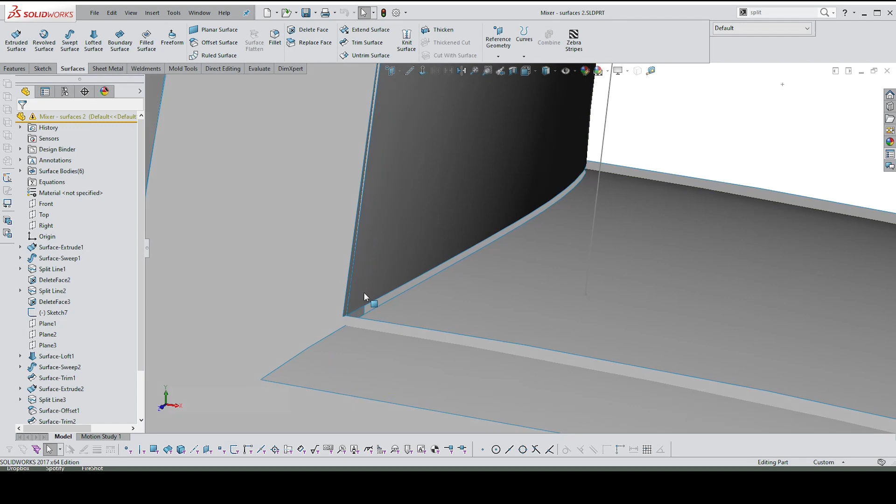What I showed you on Tuesday was in fact in many ways unusable, other than being able to generate surfaces, and I'll show you why very quickly. If I try and trim the surface, you'll see what's going to happen. You can have a look just without trimming it. You can see the gaps in these items. They don't line up.

When I try and trim it, it's going to create a mess, so I'll just show you quickly. If I say remove these two items, I'm left with a tiny sliver over here, which also relates to how that top surface or this outer surface relates to the handle, because if I try and trim this, it trims away the whole handle. To get that right, I'd have to go back and fiddle with items to get them to extend beyond one another.

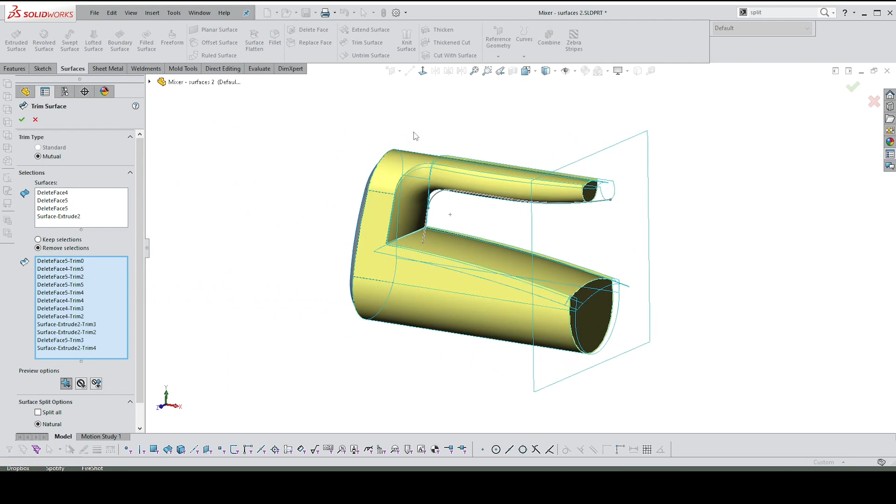And so it actually ultimately is not giving me what I want. So no matter what I do, I'm always going to be left with strange surfaces left over, which I'll never ever be able to probably get to work, or to actually knit together again.

So let me show you quickly what it is we can do with a whole lot simpler process, much more accurate. It's going to look more complex, but is in fact much simpler.

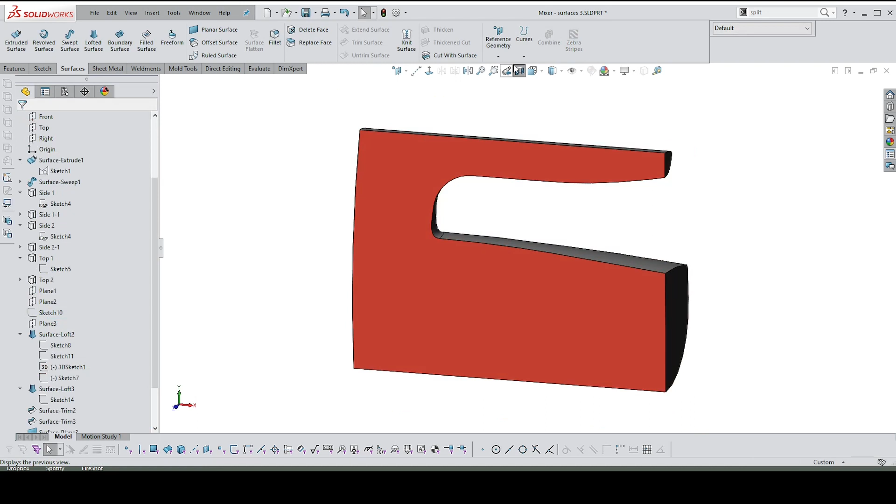So this, if you have a look at it, is a solid. So I've been able to knit together, I've been able to trim everything. I've left out some details, but those details can be created once this is a solid.

So to do this, I'm going to create a new item, a new part. And there are a few things I didn't show you in the lesson. One is that we actually do need some kind of sketch to start with.

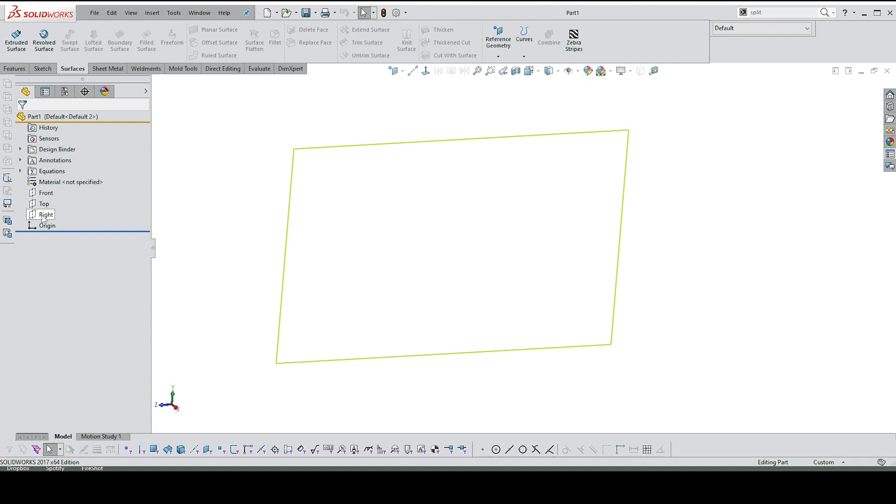So I'm going to put a sketch on the right plane. When I say a sketch, I mean I want a sketch, an actual sketch picture, which is something I would have drawn in a program like Sketchbook Pro, or whatever sketching program it is that you use. So this is something I drew in 2D. Obviously, I would have drawn it to scale. This is what I would have figured. This is not going to be suitable in this case, but it was just an exercise.

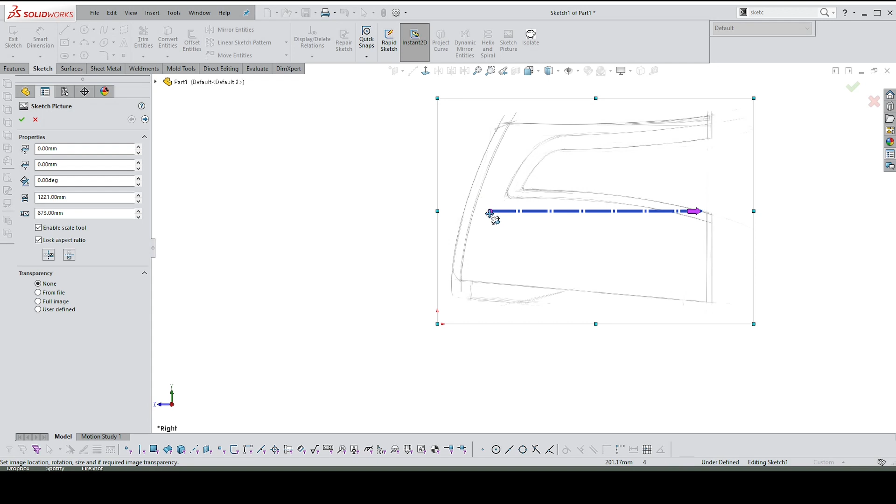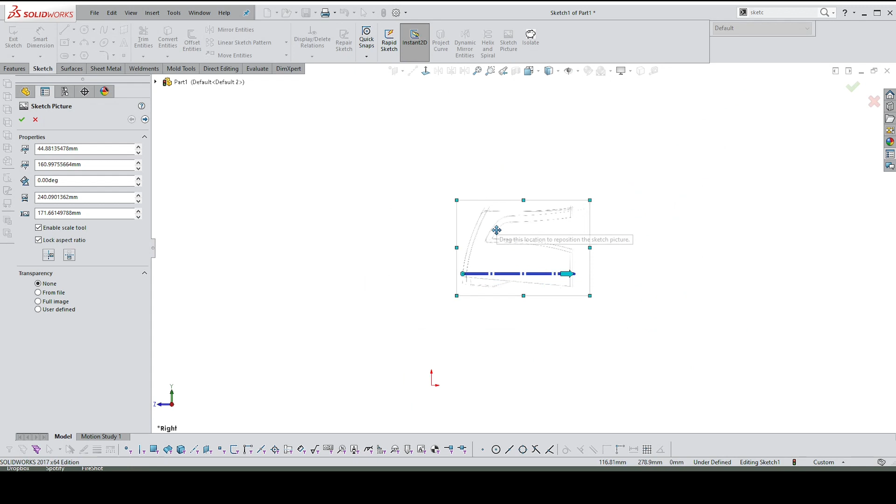The way this sketch picture works is you drag the left-hand side of the scaling bar to the left-hand point of your sketch, and then you drag the right hand out to the right-hand side, and then you'll get this dimension dialog box, which you can enter the actual dimension you want, 200. It might go off screen, just zoom to fit, and then you will drag this to a point that you'd find suitable.

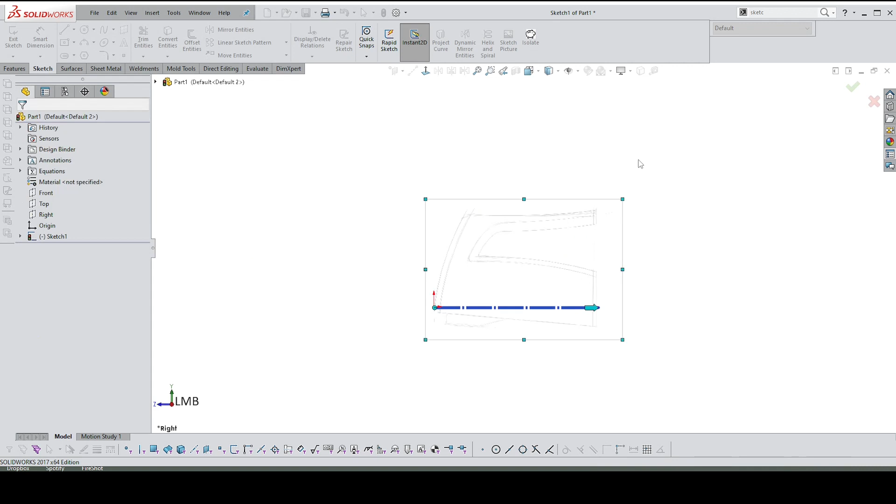So it might be there or somewhere else. What you can also do is, in the transparency, you can change your transparency to, say, half or whatever it is that you find suitable. And then we say, okay, all right, so that would be the sketch, and then I could actually use those lines to start the whole item.

I'm going to delete this because I'm not going to use it. So let's just exit the sketch.

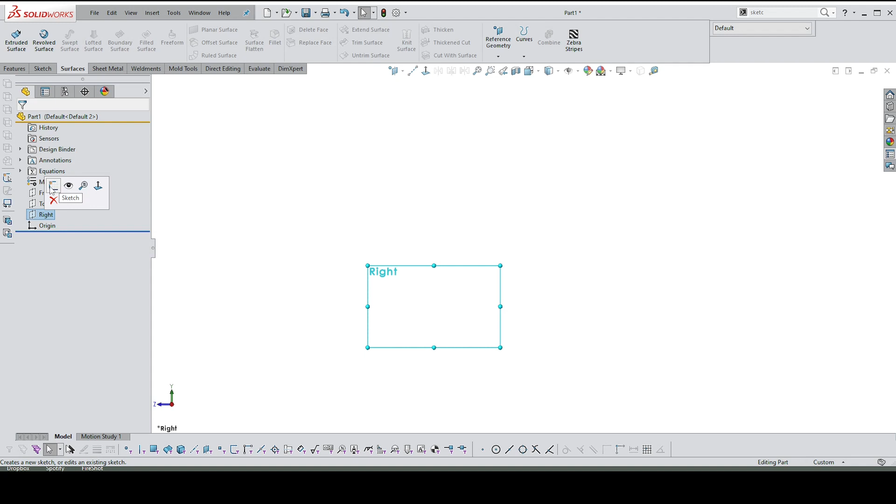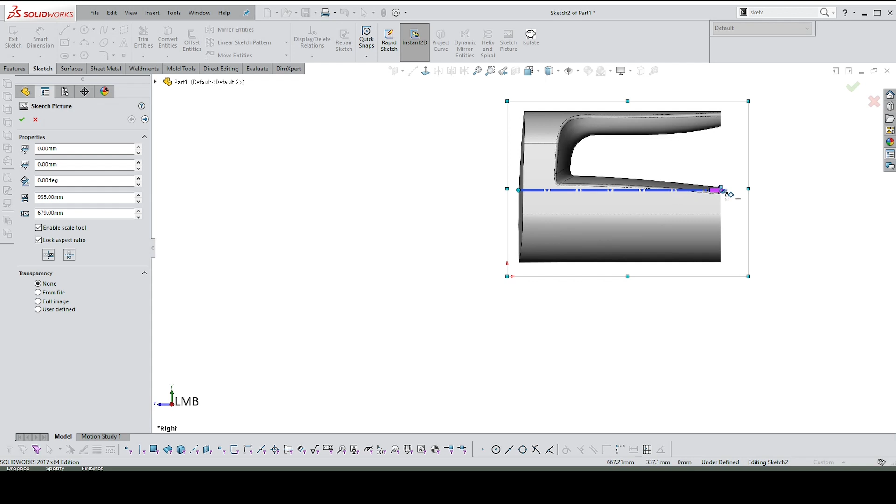Instead, I'm going to bring in two sketches which I've copied from that prior model that I showed you. Sketch picture, which will be here, and then it'll be that one there, which I will attempt to scale very quickly. So let's just bring that across. So this is kind of rough at the moment.

I don't need it to be accurate because I know where I'm going with this, but you can have, obviously, if you want to make it more accurate, somewhere around there, I think we'll do it. And change the transparency to about 0.65.

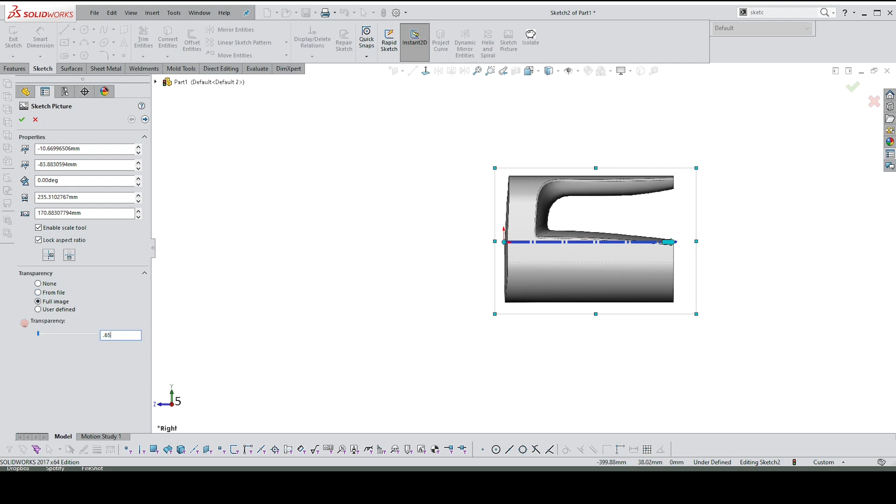Out we go. And then in the top view, I'm going to do the same thing, sketch. So in this case, it's going to bring the sketch in the wrong orientation, I'm pretty sure. It has.

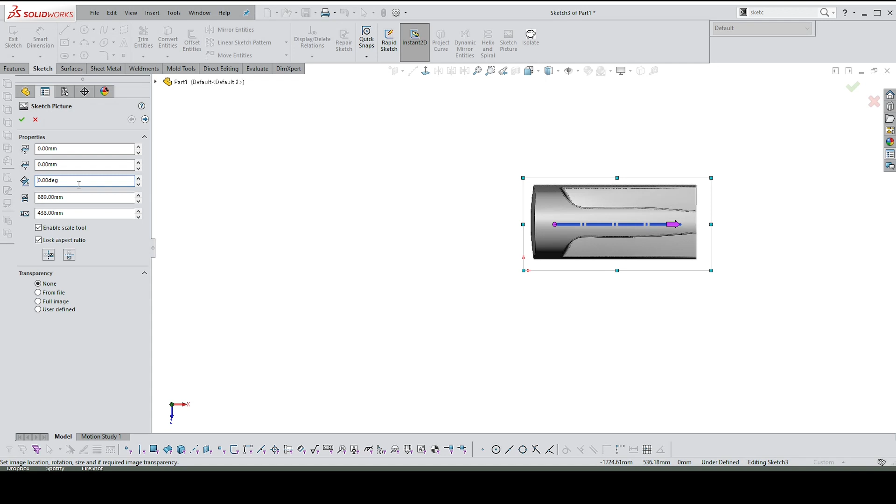The way to get this to change is just to type in here under degrees. I want mine to be 90. That should be right. And then drag this down, that one up. That'll be 200 as well. Roughly in place.

Make this a lot more transparent and exit. Okay, so let's just see if we have two. Yes, we have two intersecting sketches, which will give us a strong guide as to what we want to do.

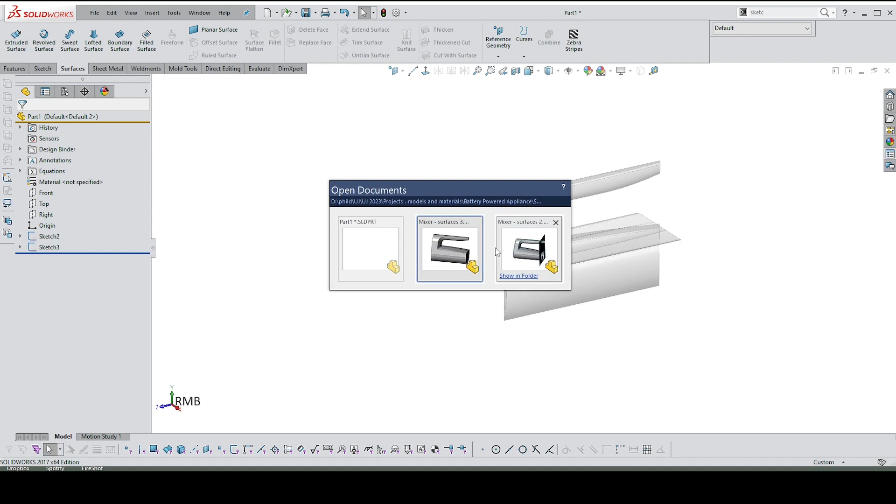I'm going to show you a neat little trick, which doesn't really apply to this, but will apply to other things. If you've got two models and want to copy sketches from one to the other without having to redraw, you just click on the sketch. At the moment, I want to make sure I place the sketch in the correct view again. I've got my sketch in my right view, and my other sketches might not be right, but I'll show you how to do this.

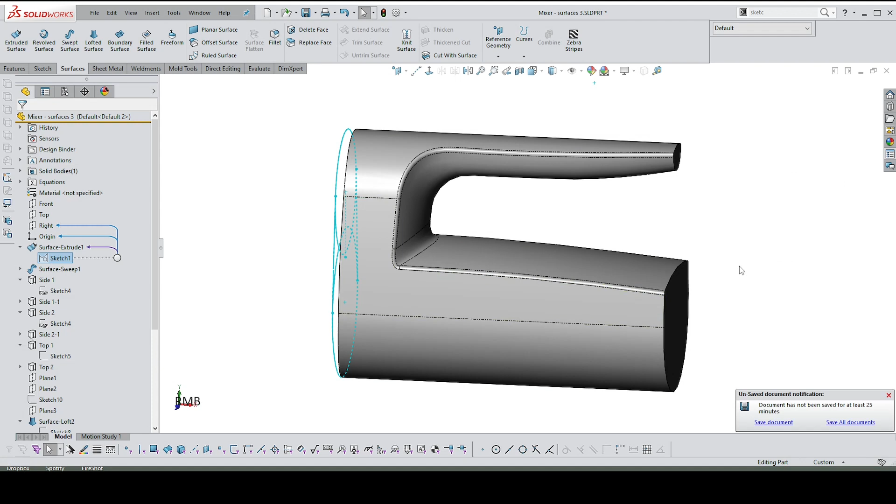You say Control C to copy it, go back to this file here, and then select the plane you want it in. Actually, it's going to bring it in the wrong plane, but I'll show you. Control V, it'll place it in that plane. There it is. I don't want it in that plane.

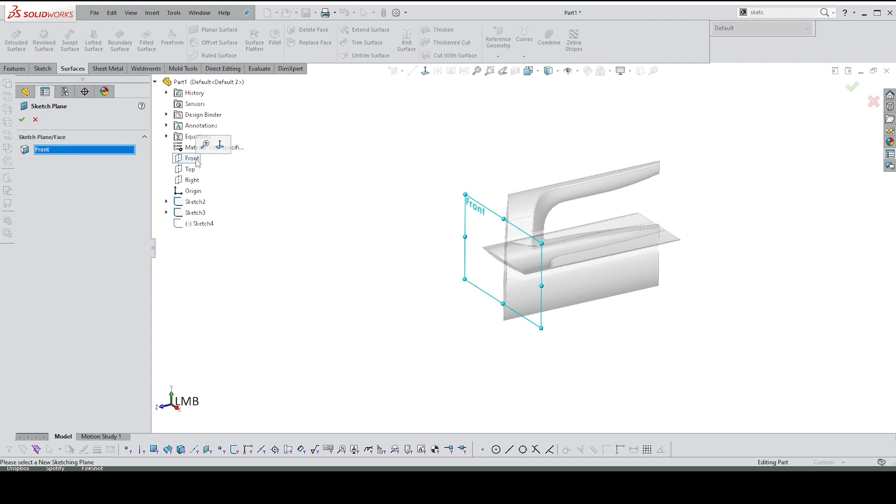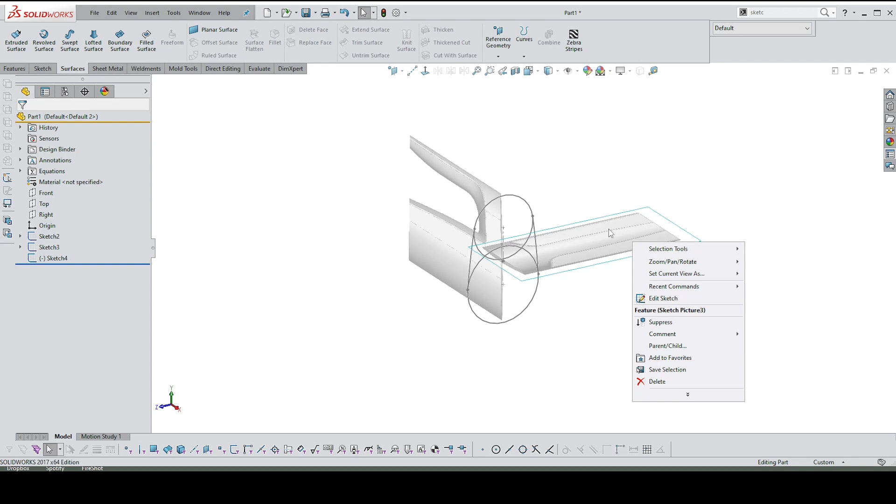I want it in the front plane. It's just because I've orientated these sketches on the front plane incorrectly. I could actually change those. In fact, let's do that. I'm going to change that to a front plane, and then this one I will edit. There it is, and then I just drag it across roughly to where I want it to be. Okay, so those should be in place. There we go, perfect.

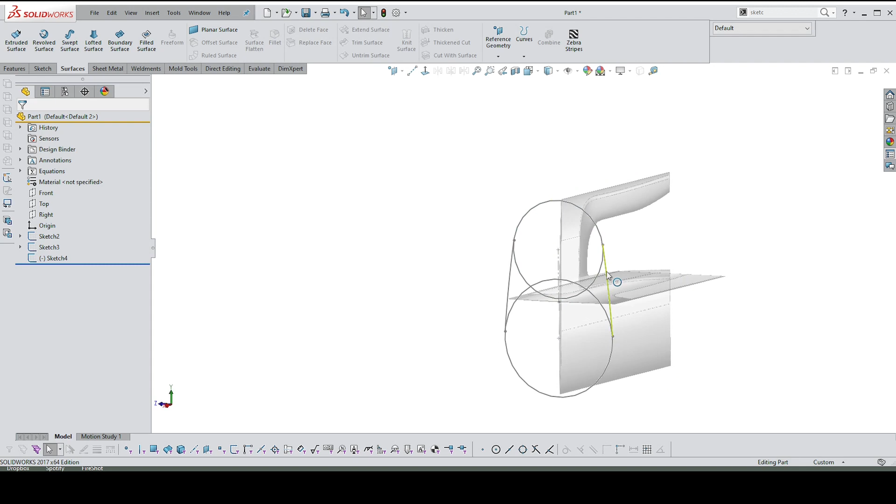All right, I'll kind of skip this bit. I'm going to redefine this. No, actually, it shouldn't be too difficult. I know that when you bring a sketch through, it's going to come through without some of the definition, so it's not fully defined. At the moment, I don't want anything to go out of whack, which tends to happen when you start moving things around.

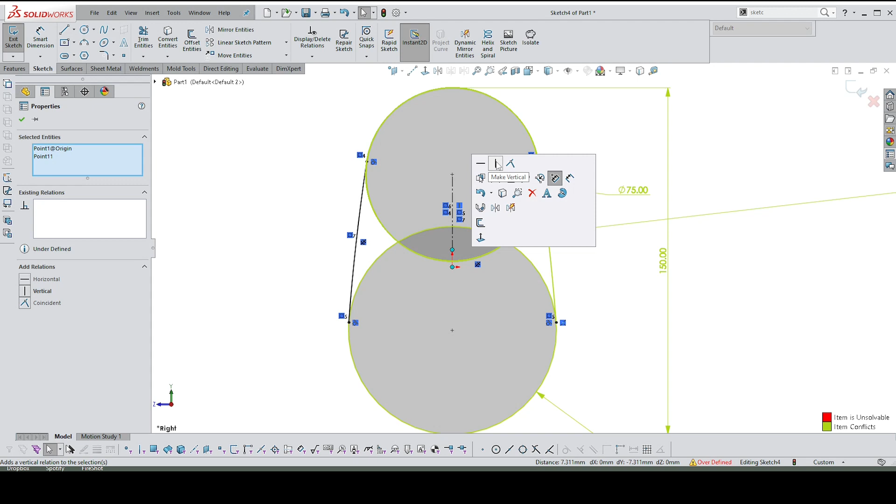So select everything in the sketch, make it fixed. Don't worry if it gives you an error, because all I want is to get that item linked to this one. And I know that as soon as I do that and take the fixed items off, it should become fully defined, other than giving this a dimension. See? So the dimension is valid.

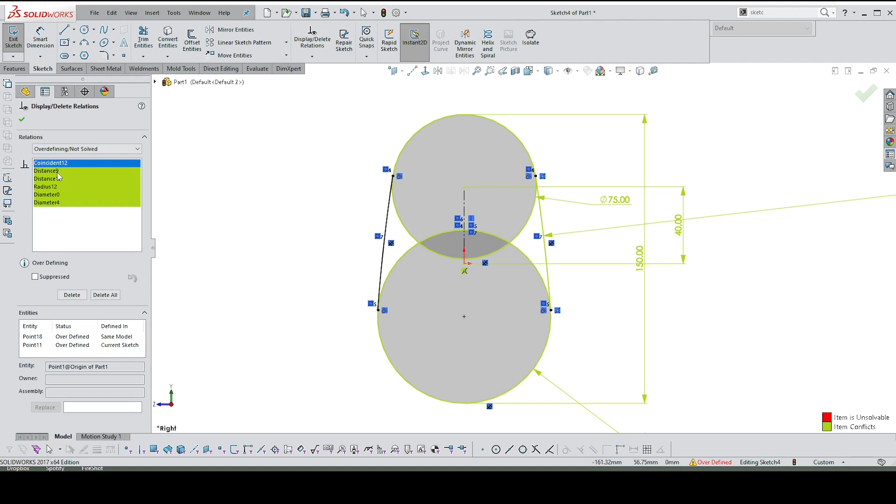And if I want to get rid of all of those relations, just go to Display/Delete Relations. You'll see all of the ones that are overdefined. You can just delete them all. And there we go, it's fully defined. So the only thing we don't have is some dimensions. Obviously they are in here somewhere. I can't see them, but I'm going to leave it as it is. It's pretty much correct.

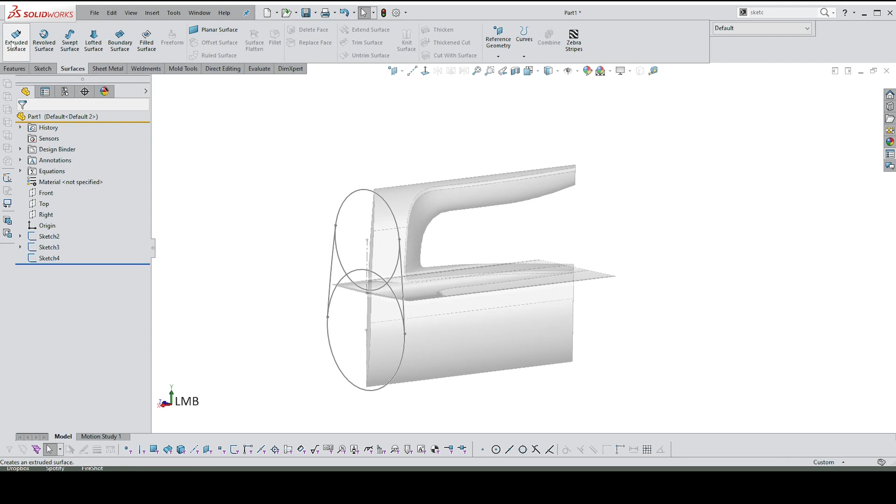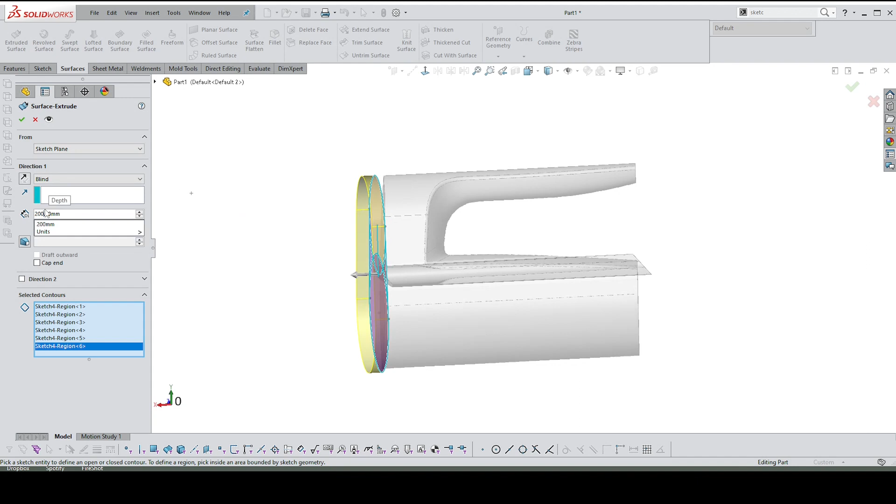So here, just to remind you of what I did on Tuesday, we extruded the surface, and you can select the contours. I'm going to delete that one and just select all of the parts that I want. And they're going in the wrong direction, which is fine. I'm going to just keep them going in that direction. There we go.

Okay, so there's my basic item shell, and then the two sketches. I'm going to hide this for a moment because I now want to create a sketch on this plane here, on the front of the right plane, the front plane. So front, I'm going to put a sketch in place.

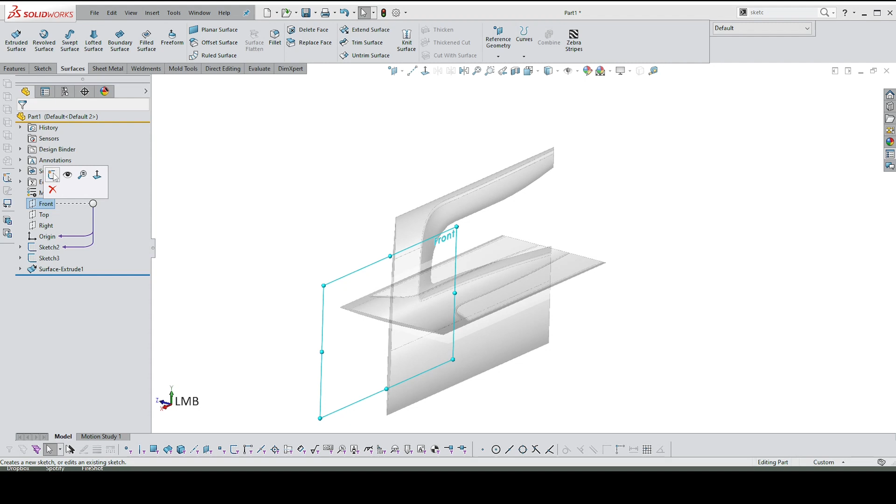And here, a little bit of strategy is essential. This is where you have to think about what you want to do. What we want—just to go out of this again and make this one visible—oops. What we want is a set of curves which are projected onto these planes, which meet precisely at a certain point, and from which I can then generate all sorts of other sketches. So that's the basic idea.

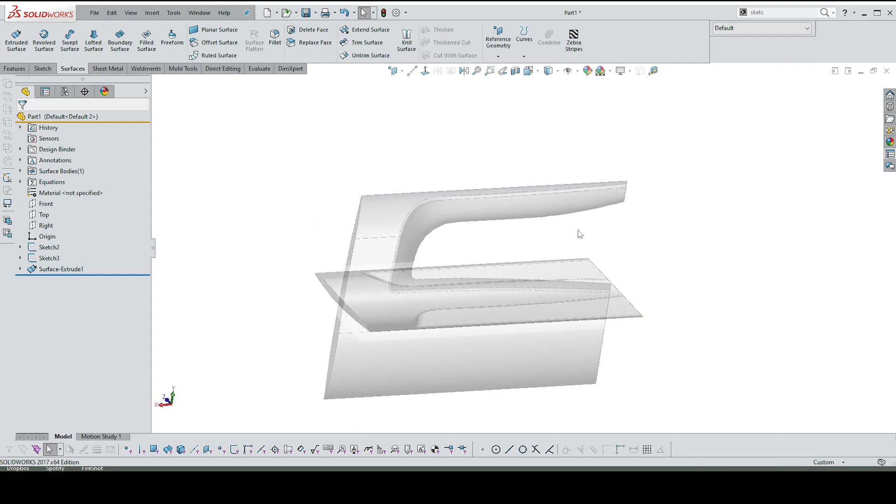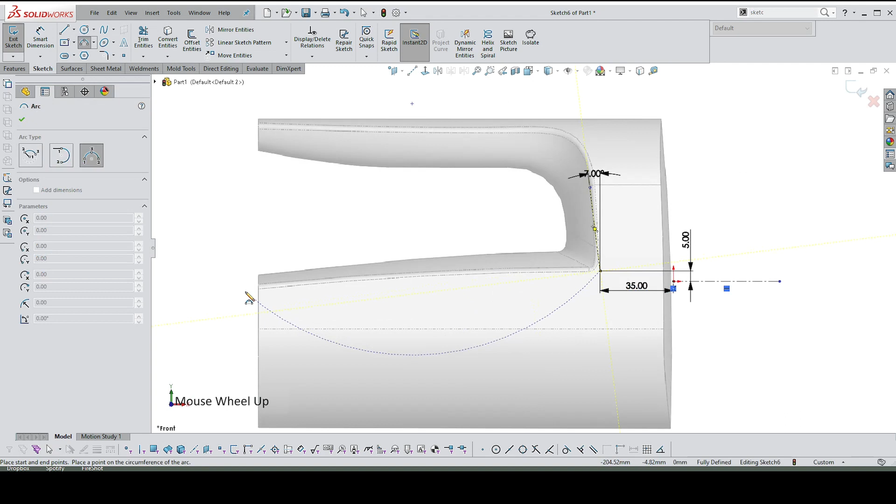So to do that, I'm going to put a sketch in here, and I'm deliberately starting from scratch instead of shortcutting, just so that you can see what it is that I do. So the important bit now is this 3-point arc from there to there, roughly like that, and some dimensions.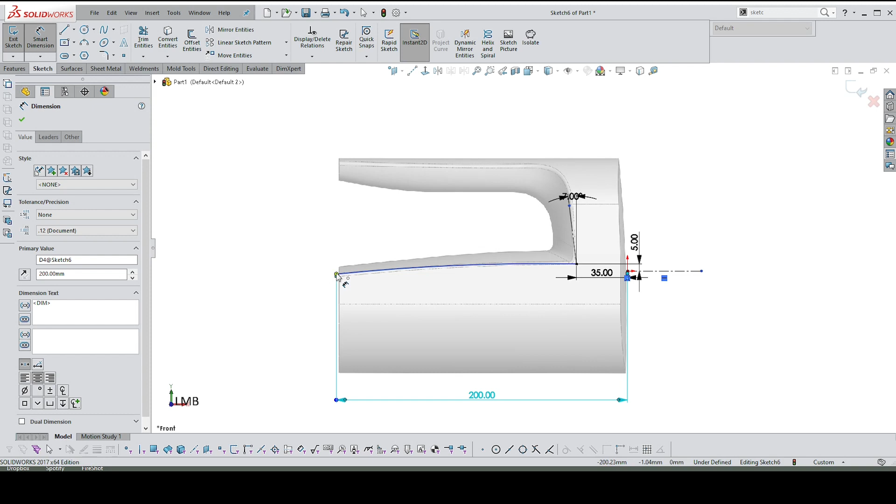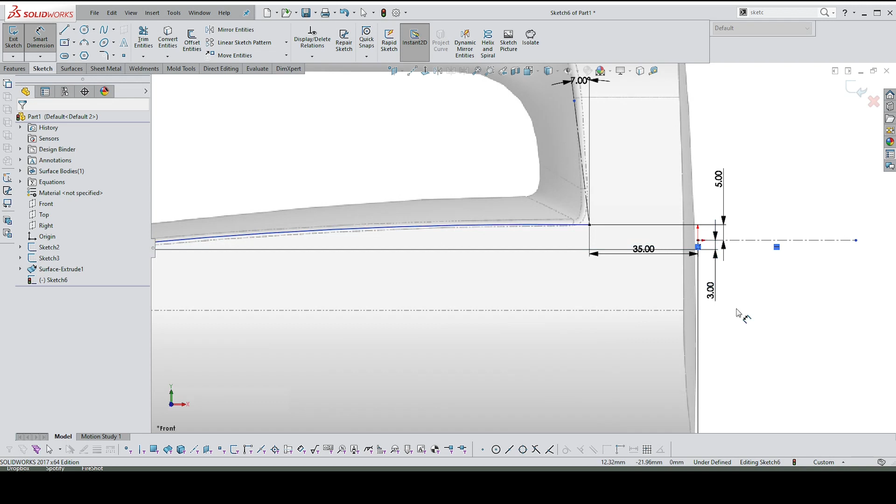I know that should be 200 millimeters. So you can see my underlying sketch is just a guide. I'm not following it strictly because I know what it is that I'm looking for as far as dimensions go. So let's make that 2 millimeters, perhaps a bit more—3. That's fine. And then give this one a dimension, I think about 1.5. Yeah, nice sort of gentle curve. Okay, so with that basis in mind, we can generate all the other curves.

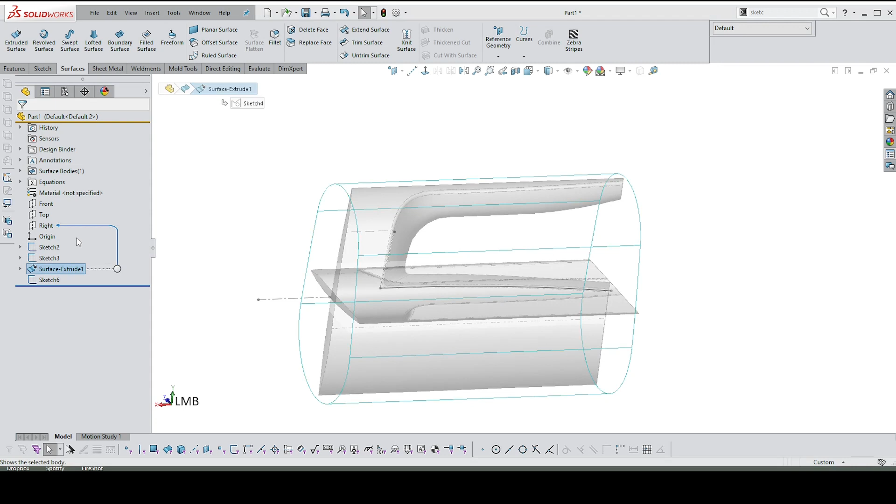So we just need one curve. I'm trying to make this as simple as possible for you if you were to follow it. So I need one curve which I project onto the surface, and then I can base all the other curves off of this one curve. So the first curve you choose is important in this instance.

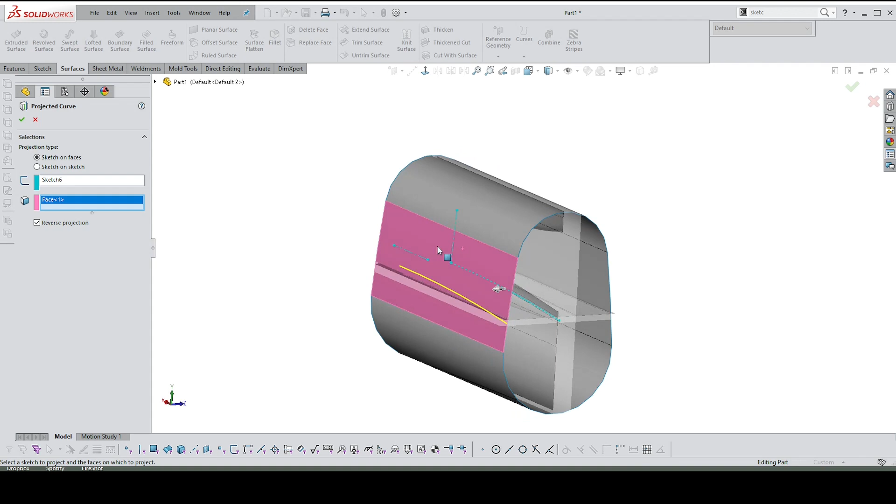So here, last time we did a split line, which split the item, but obviously I have to have a closed curve, or a curve which allows me to split a whole item. In this case, it won't. So project curve to that plane, and if it doesn't show as a yellow line, just click on this or say reverse projection.

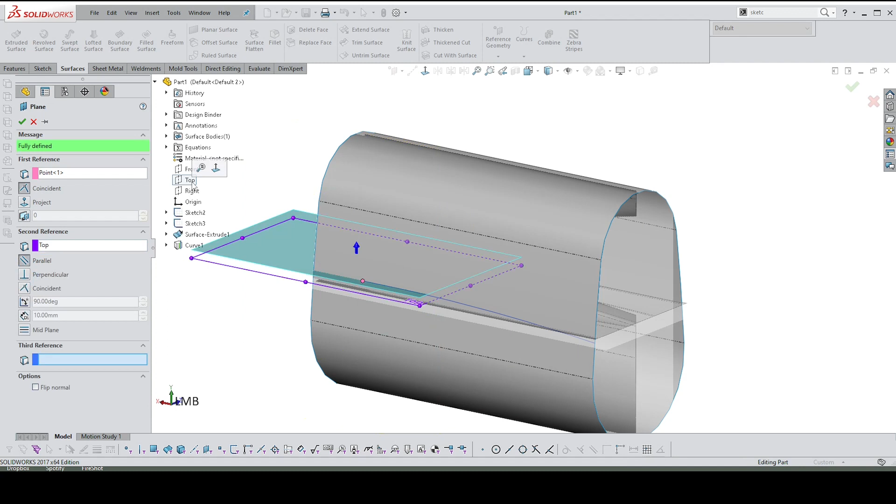Now I could do the other side as well, but it's not necessary at this point. From here, I need a plane, one which sits at that point and which is parallel with the top plane. So there's my plane, in line with that item there. And on that plane I want to put in the top curves.

Let me see if I can find it quickly enough. It's not that one, it's one of these top sketches there. So I'm going to Control C, select the top plane, Control V.

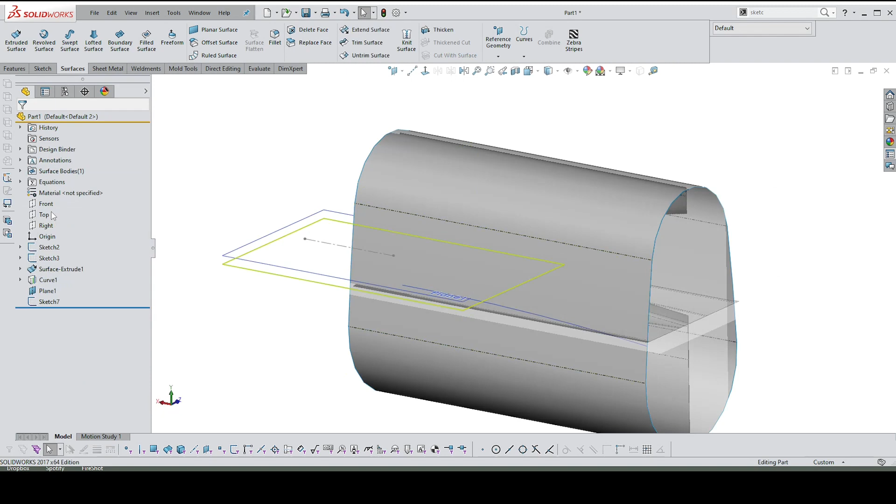Okay, I figured out where I went wrong here. This item is on the wrong plane. Let me explain: this new plane that I created is at the end point of that line. So what I want is for that sketch to be on the same plane so that it meets this point on the same plane. So all I need to do now is edit the sketch plane, and instead of the top plane, it should be this plane here, the sketch plane.

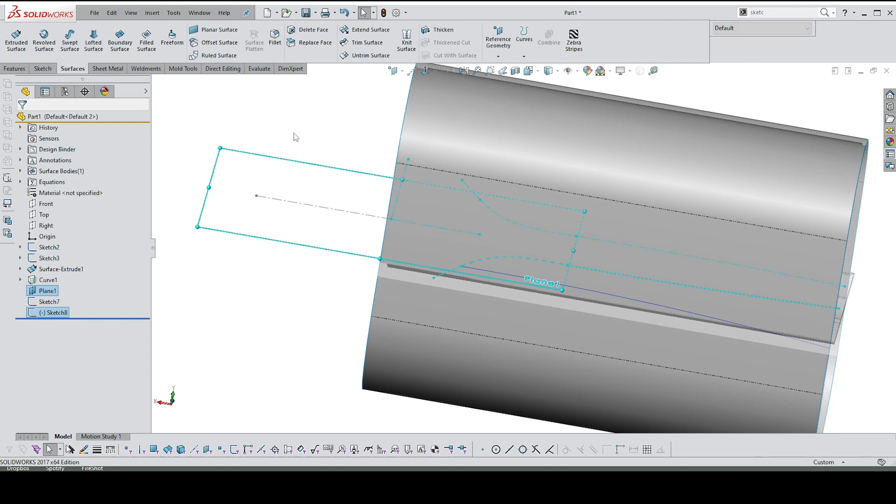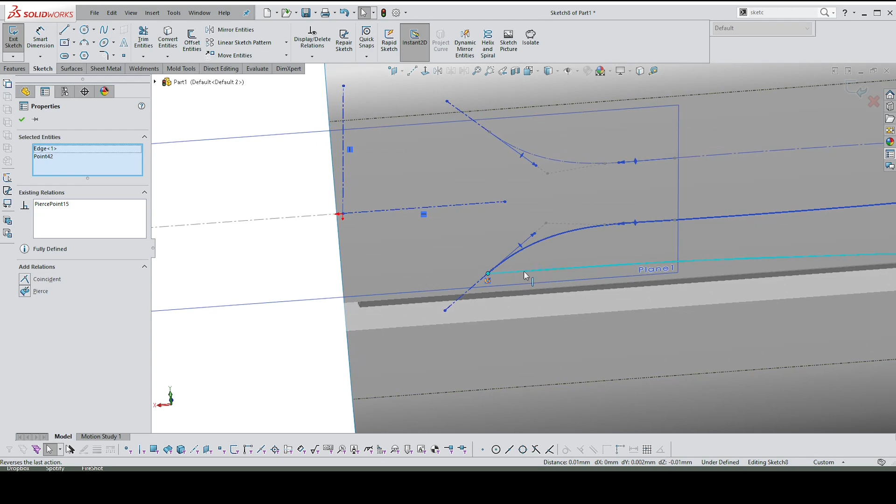With that in place, if I now edit the sketch, you can see they're actually meeting that line, that point in that line, to pierce. So now I know that whatever I do with this line, it meets at the intersection of that prior line, this one here, which is going to cut through and give us the flat surface on the top, because this one here is going to project onto these other two surfaces and give us the handle cutout. That precision is what you're looking for, that absolute precision that we have there.

So I'm going to properly define the sketch and then come back. One of the things I do here is make sure that that and that line are coincident, so that it's also exactly lined up with the edge of this item here. So let me fully define the sketch. All right, here's a fully defined sketch.

I've given it a dimension across these two. I've mirrored these two items. I've given that curve a dimension. I've given the beginning and the end of this 3-point curve, and that one, two locating dimensions - a width and a distance from the right hand side. And then I just make sure these two are tangent to one another.

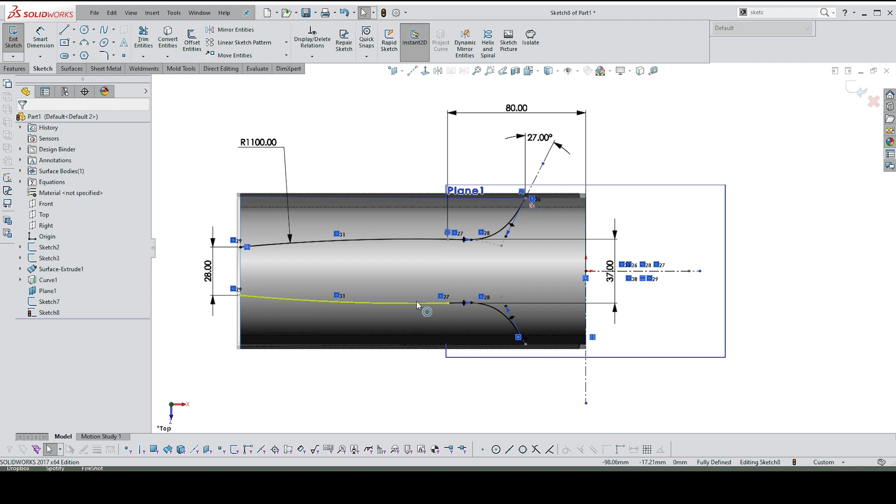So that's great. Then the second part of the sketch, the one I've mirrored, I'm going to make into construction geometry, and you'll see why in a minute. So now this is fully defined, and I'm going to exit that. Not only is it fully defined, but it's actually linked to the other sketches in very precise ways. So for now, I'm going to hide these two because I don't need them.

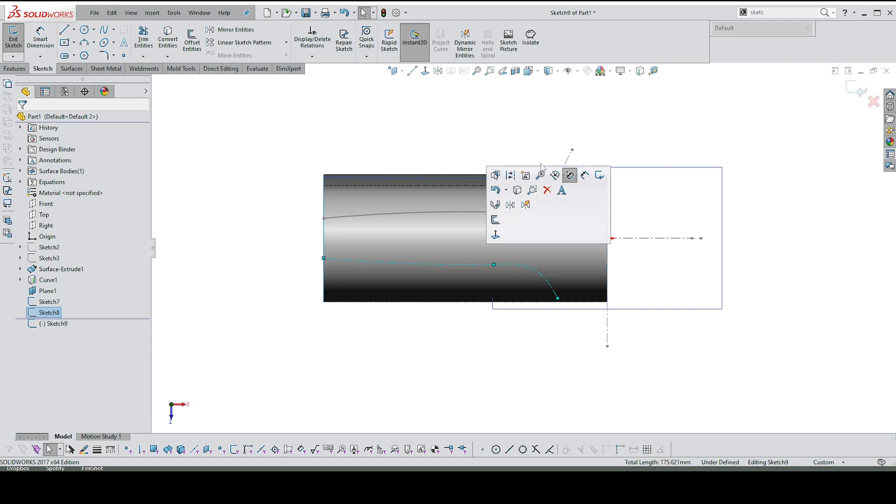I'm going to project, but before I do that, I need to project that onto these two planes. I want to actually create another sketch on this plane, so just make sure you choose the right plane, and let's put a sketch on it. So that sketch I'll just copy those two by using convert entities - convert entities is also in the sketch item, and if you hit the control button, it is here. Okay, so that's all I need.

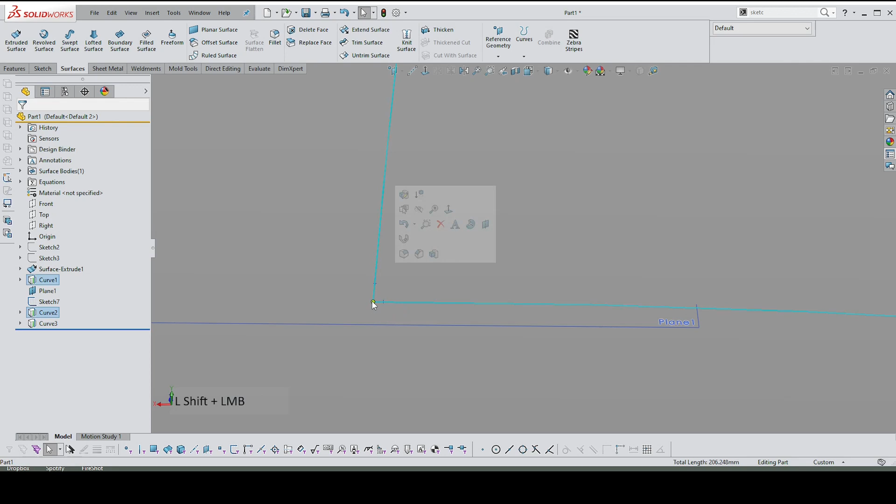So I've got two sketches there that I can project. Let's select one of the sketches, project it onto this curve and that curve, this surface and that surface, these two surfaces, and do the same with this one here. Project curve onto that one and that one. So now, if we've done this correctly, we should have one curve meeting another curve at exactly the same point, completely linked. We just need to do that again on the right hand side.

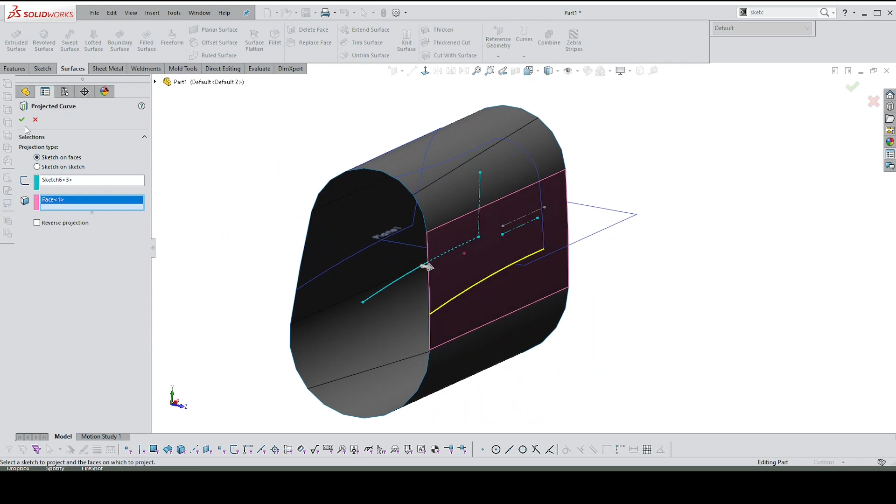So let's just find where that sketch is - it's hidden under this one here. I'm going to show it, select it, and use it to project onto that plane. There we go. So we're building up slowly a network of curves. I've got four curves so far, and now I need a few others.

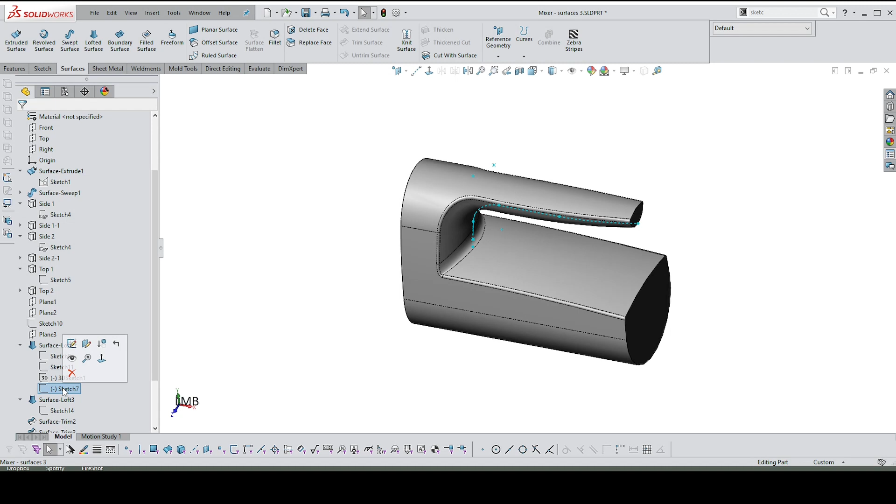So let's go onto the front plane again and sketch on that one. Once again, I'm going to copy a sketch from here, if I can find it - I think it's this one here. Control C. Obviously you wouldn't be copying, but I'm trying to shortcut things. So if I Control V, there it is. And I just need to put a center line in here and move these items.

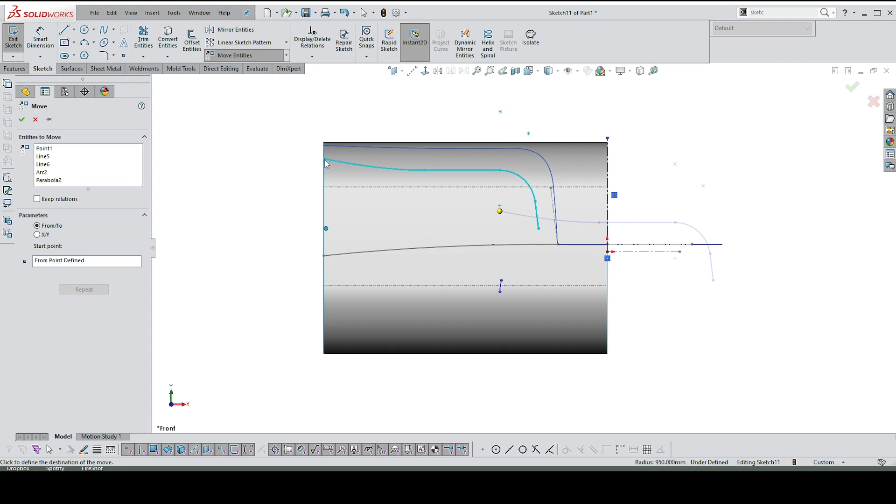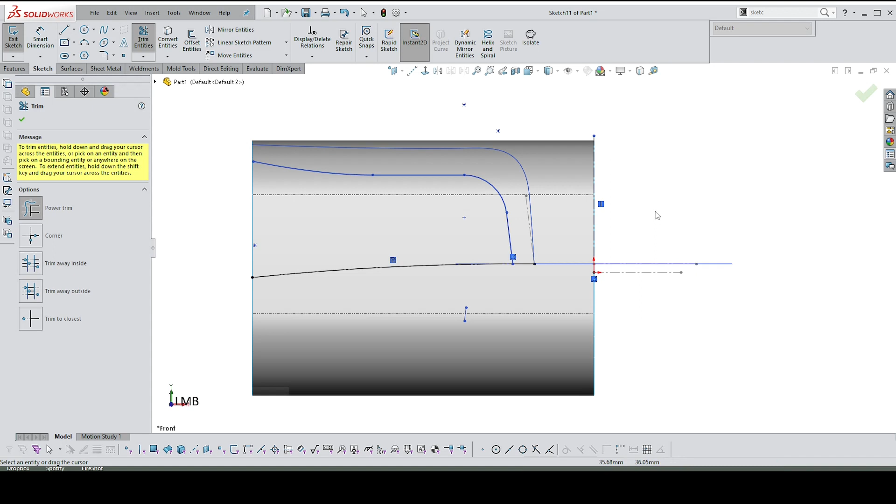Okay, I remember what I have to do here. I need to get that to touch this line, and I think I can do that by just grabbing that line, making it into that one there. Power trim down to the bottom, and then also fully define this.

I'll come back once it's fully defined. All right, so this is almost fully defined. I've neglected to define this one, just to show you a matter of interest. When you bring sketches across, sometimes they don't bring the sketch that you want.

In this case, it's brought a parabola in instead of a spline, and I would like to replace that with a spline. So I'm going to put a point in here as a marker of where that begins and ends, and then put a spline in its place from that point to there, and just get this to line up using a tangent.

I'm going to delete that point if I can find it. And then I want that to be coincident with that item. It should be, once I've done so - 65, I'm going to make that a bit smaller, 63. No, 65 was right.

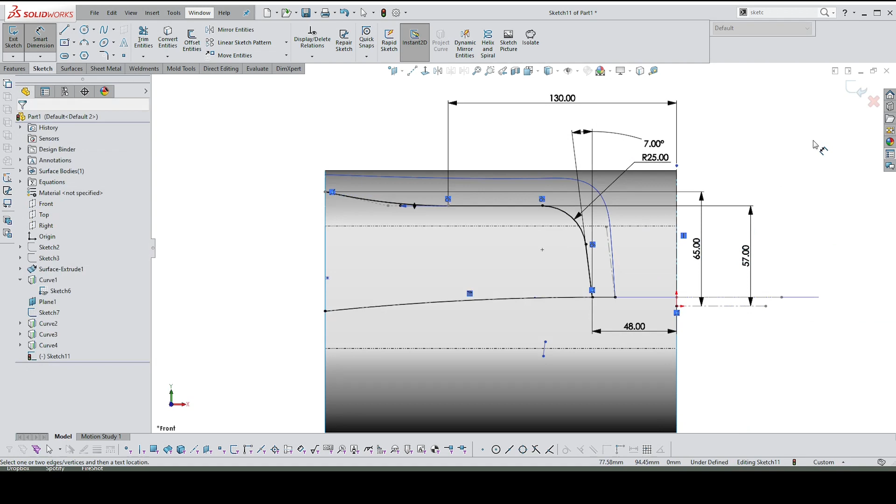It should be that the moment I put in this dimension here, that is fully defined. Okay, so once again, what I've got is a curve which I know is linked to that line there.

That center line is kind of my reference point for everything that I do. So this line here is going to be the underside of the handle. So I need to go back in here.

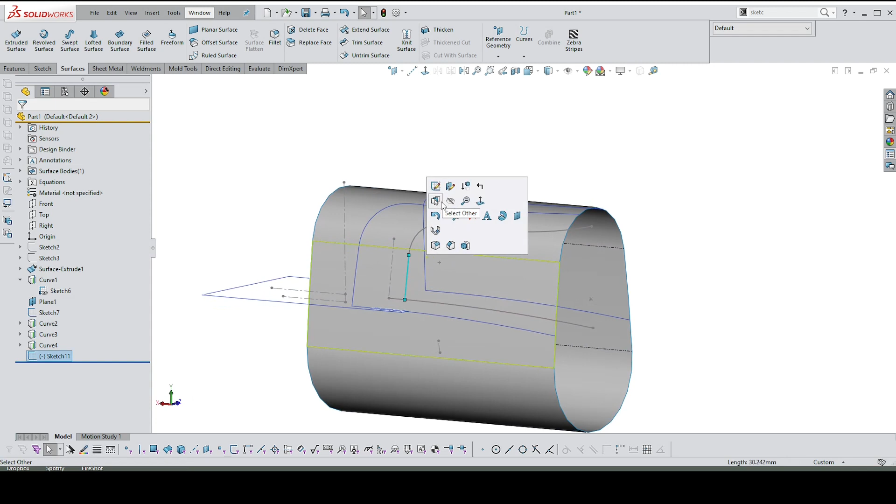I just want to show you one other thing. Yeah, this might be better to do it here. So I'm going to put a point in over here, and put a dimension to that point. That point will mark the high point of a curve. Let's just put a dimension in, and I'll show you where that would exist. So make it 13.

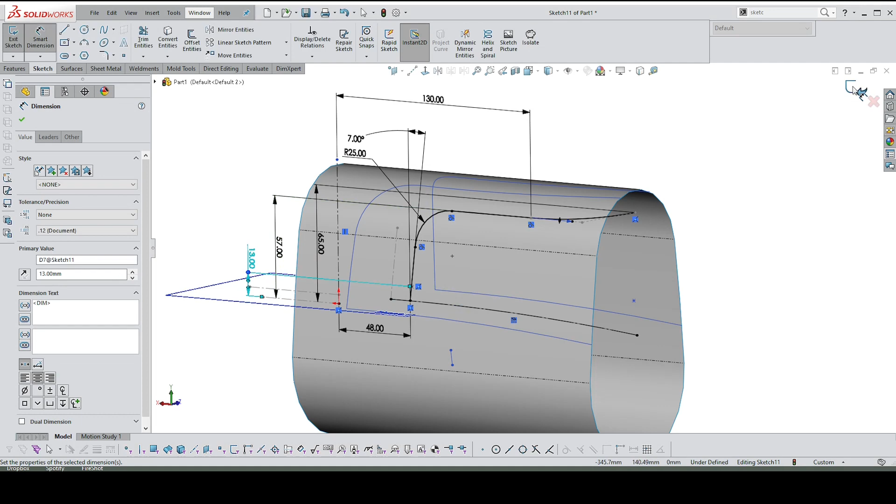So that point there, if we go to the right plane and put a sketch in, that point exists over there, that one there. So if I put in a 3-point arc, just go from one to the other to that one, just drag these in a bit.

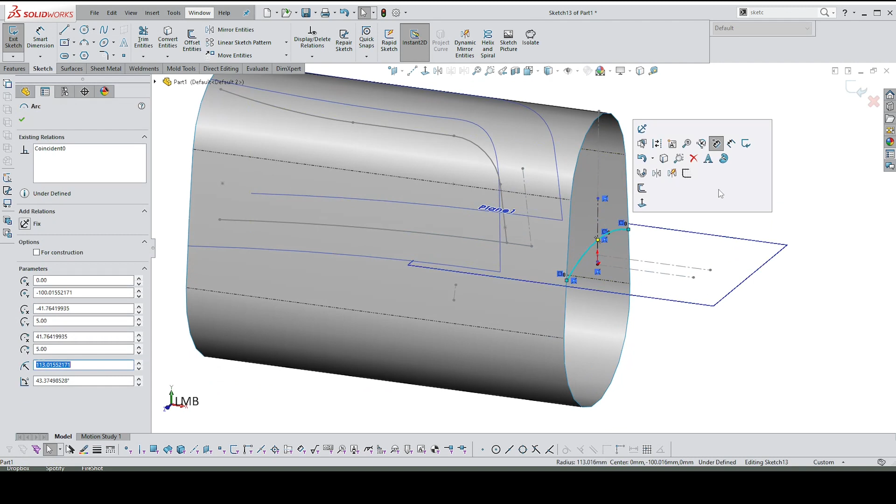If those were linked, if that sketch were linked to this one here, to the end of that one, that would form the basis for the start and the end, or be the end of the handle curve, and then the start of the plane in between. I hope that makes sense. Otherwise, I'll explain it in person if you want to know how that works.

So let's go out of that. I don't need that sketch because I got that point. That point marks the high point of it. So let's put that in.

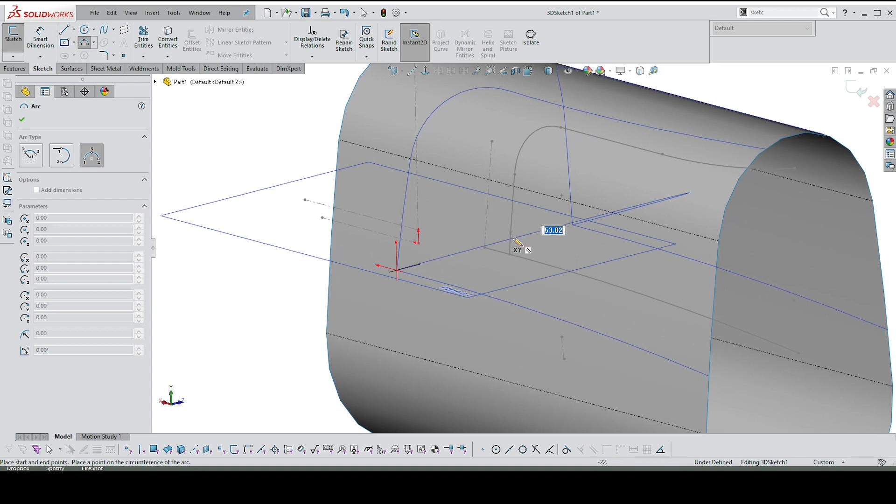So under sketch, I'm going to use a 3D sketch, and I've got point 1, point 2, and a third point that'll allow me to put in a 3-point arc. So I'm going to select that end, and then the third one is this one here. So let's see, that seems to have done it.

All I need to do now is select that point, select this line, and make it coincident. Should have turned black - there we go. Okay, so I did successfully select the endpoints, and I now have a fully defined 3D sketch, which I can exit.

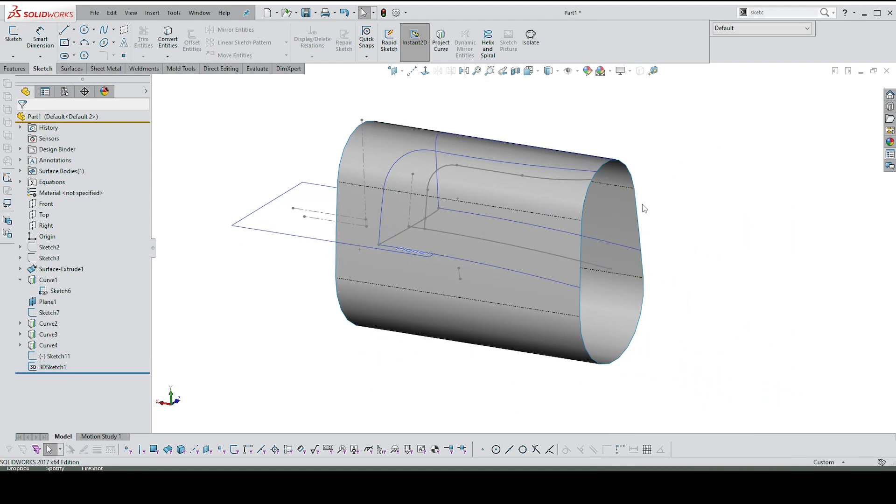I need a few other sketches, so I'm going to select just this line and put in a plane on that line. So that's fully defined. Let's drag that out. I'm going to put a sketch on there. And here it's the same as what I showed you in class - create a center line.

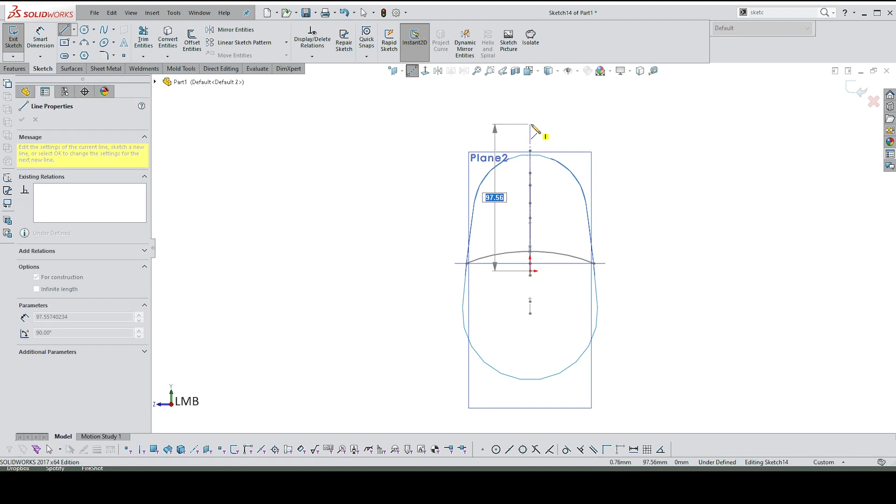Spline. Put the spline in roughly from there to there. And then go into a 3D view. Get round to that point. And then get that point.

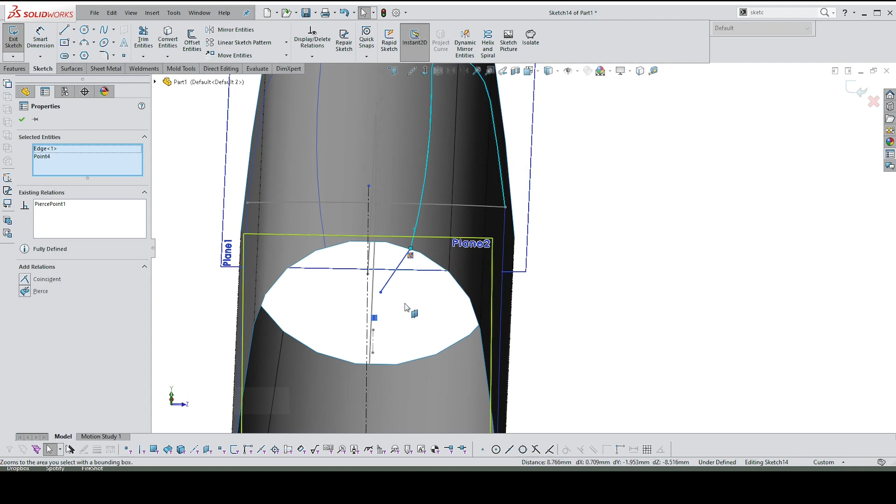So I might not have shown this during class, but just to recap, I would have shown you something similar. I'm going to get that endpoint to be merged - merge point, make pierce with that one. And then I'm going to get that endpoint to pierce this line, so I know that these are now fully connected as well.

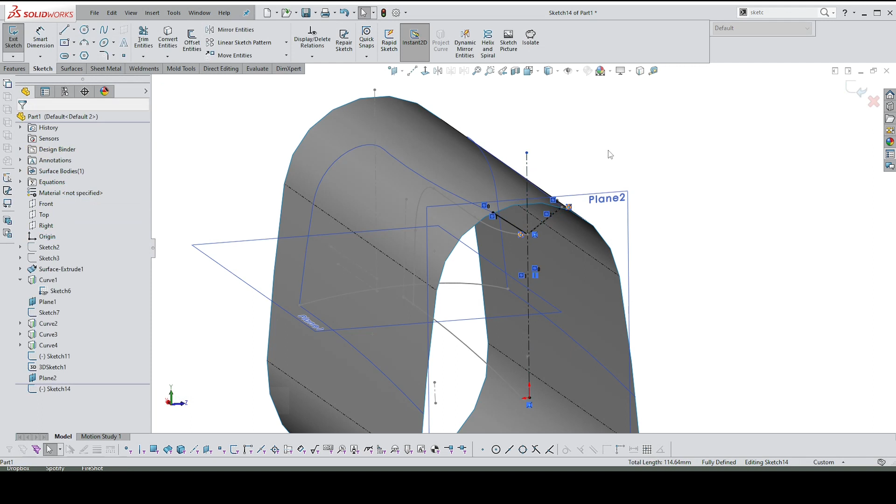That's another precise way of doing this. And I want to mirror that as a copy around this line. Say yes, and then as soon as I put in a tangent direction, I can drag this out, give it some shape.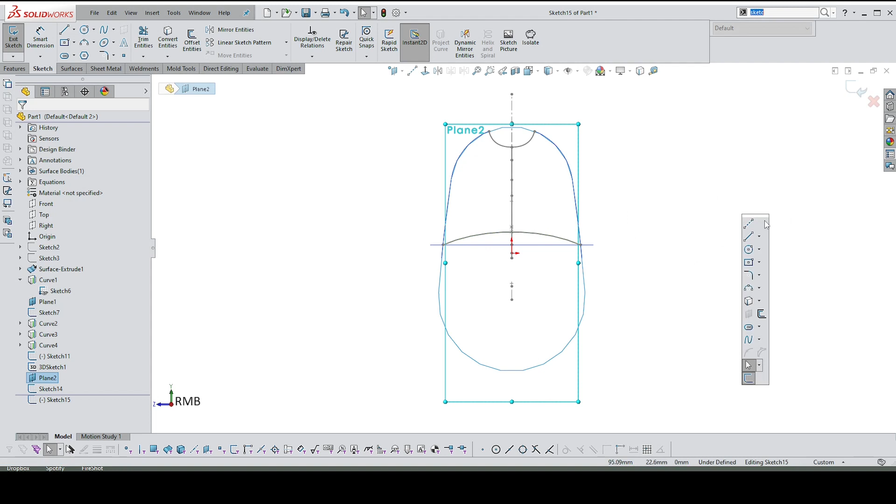You can put in more lines if you want. That's good enough for me for now. And I want another sketch also on that plane, so that's going to be one bit, which is going to sort of mirror this line. And I'm going to approximate where this should be.

Go into 3D view. And where are we? There we are. So once again, I want to make these end lines connect with these other projections as pierces, so that I'm absolutely certain that everything connects.

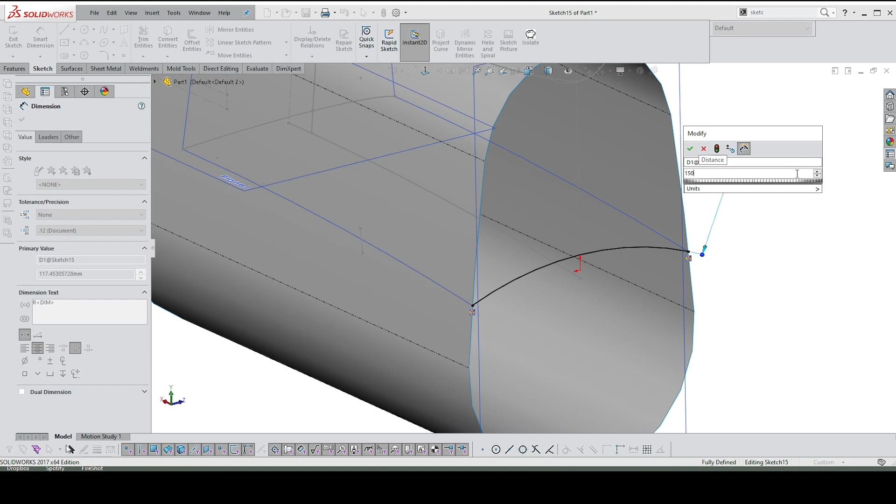One more dimension just to give it a bit of definition. All right, so I've got 1, 2, 3, and 4 that I can create a top surface. I have one curve here, I've got 2 curves, I've got these side curves. So I'm building up a network of curves. I need one more curve, which would be somewhere around there.

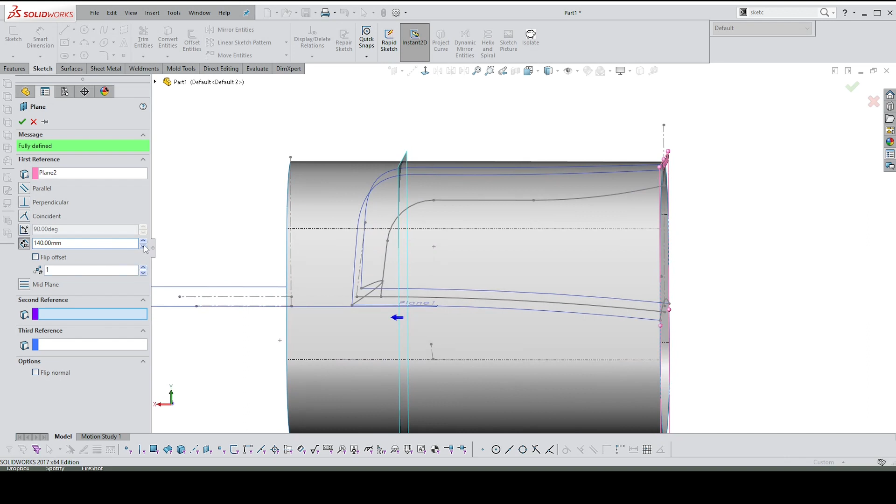So I'm going to drag this one out by holding the control button, roughly to where I want it to be. I think that should be about 140 millimeters. That's too far, let's just go down a bit. 120, okay.

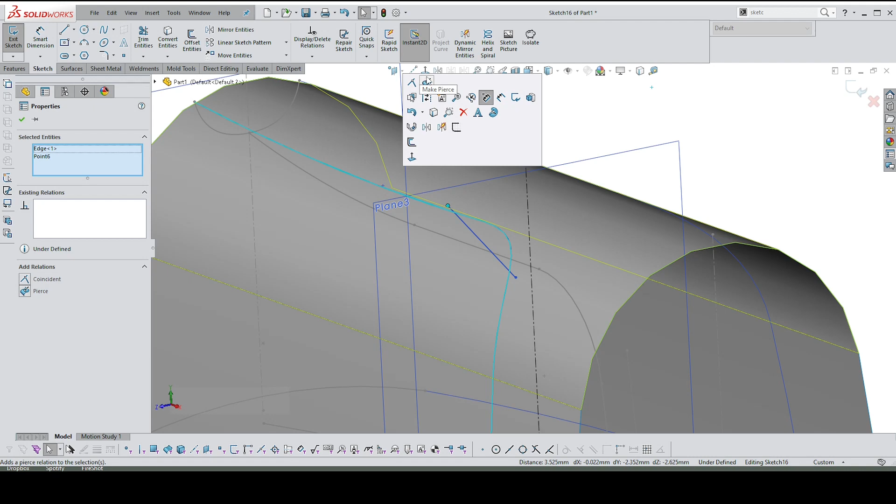And on that one, I also want to put a sketch, and so the same procedure as before, put in a center line. Spline, and this spline here must join that one. I don't know if it's the right part, is it the right? Yeah, that looks right, and then this end. So I hope this makes sense to you.

I'm connecting the set of projected curves to this center curve here using this item here, and then I'm going to mirror that about that item. Let's just go into the flat view to see what it is I've done. Get these two to be tangent, and then I can just drag one of these lines out, give my handle some shape. All right, so this looks very complicated, but it isn't that bad.

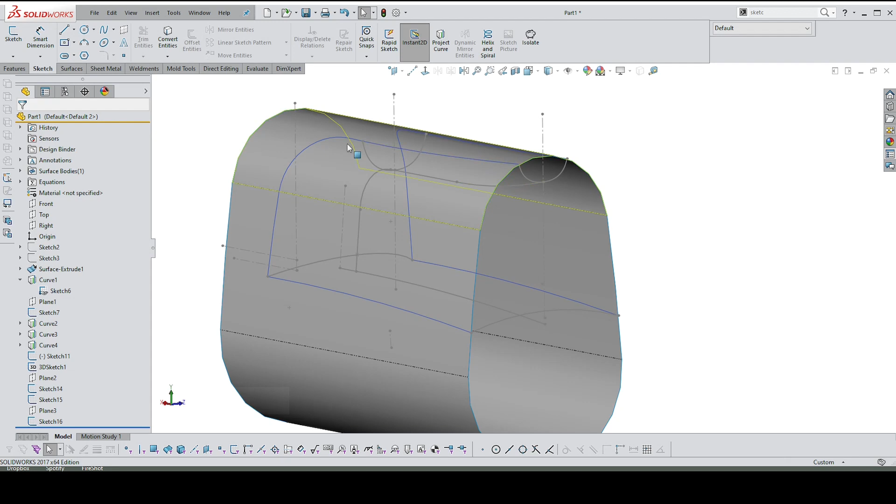Let's get rid of some of this clutter by hiding it. Unfortunately, I can't get rid of those without hiding the full sketch. But what I'm going to do now is join that sketch to that sketch to that sketch. And then I'm going to use this line and this line, which is projected all the way around, and that line to guide that upper surface. So this projected line is separate from this one, so I don't need to worry about any conflicts.

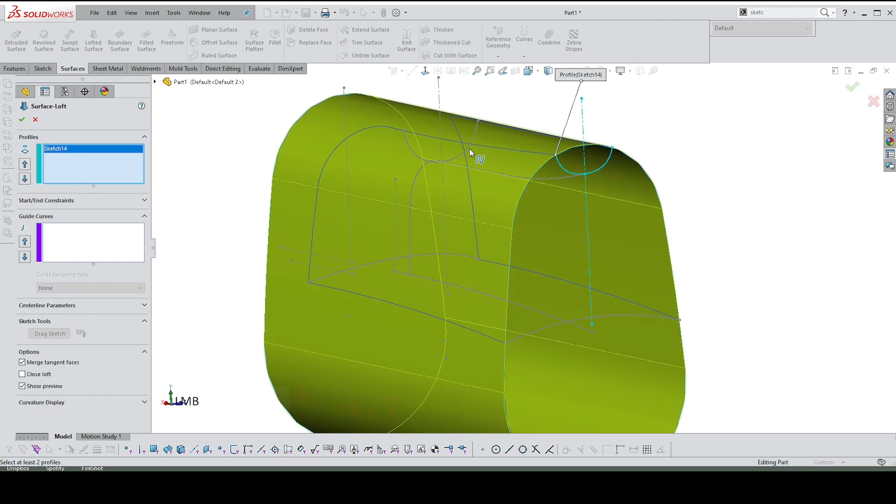Let's do that. I'm going to go to the lofted surface, and here you need to be careful when you select these lines that you select them all on the same side. You can select them on the wrong side, you'll just have to then swap them around. You'll see that that's not connecting, I would just have to move that around. There we go, so there they connect.

I showed you that deliberately just to show you that you can actually select the wrong side of the line, you just have to go and adjust it. So, and then that line. So there's my basic loft, and now I want to use some guide curves. The first one I'm going to do is this one here.

You can see that it's done it, and this one I want to be normal to profile, just to give me a normal tangency around that line, and then I'm going to select the two other lines, that one there and that one there. So now I have a fully defined loft.

There it is, and I need one more loft. So loft from would be, all right, so here I'll show you something that is likely not to work as I wanted to. Typically, selected the wrong one. Let's just swap that over.

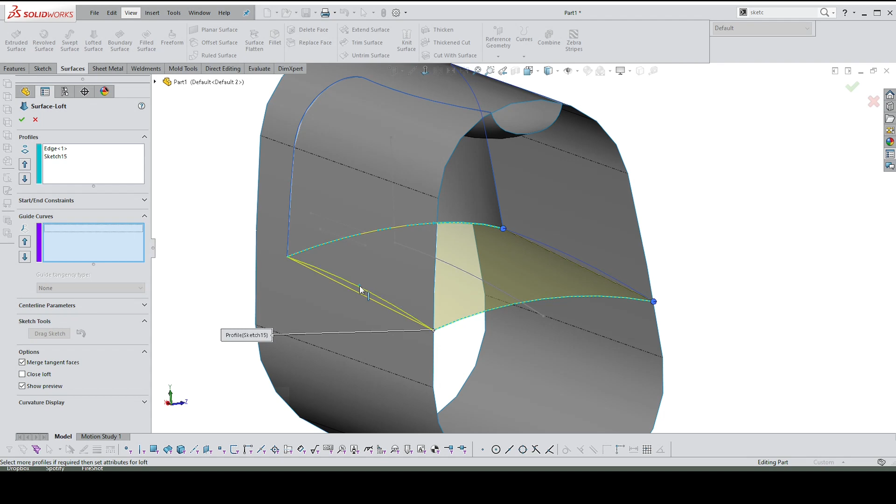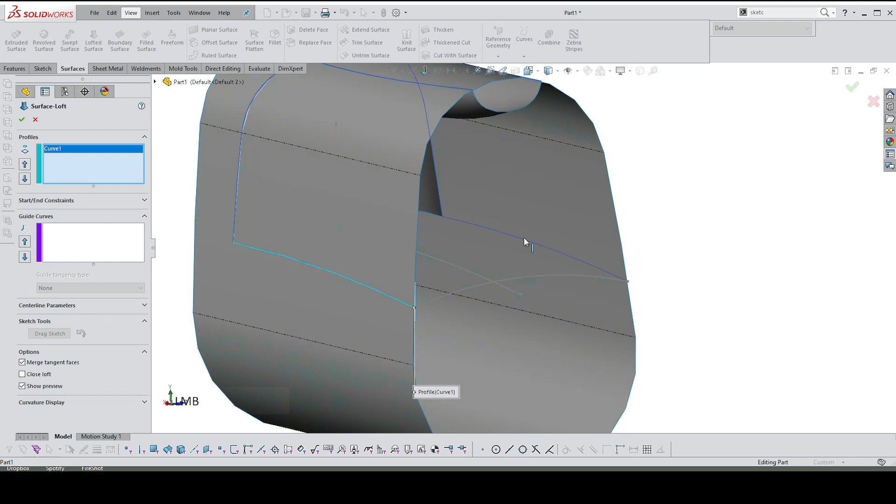There we go. Typically, intuitively, maybe you want to go from these two different curves and then use the side curves as guide curves. The problem on this one is that the second one, because they both riff off that center line, is now going to kind of deselect and flatten this out again. So this is an instance where it's better to go from side curve to side curve.

There we go, and then the guide curves will be the two end curves, the two odd curves. And I don't need any relations because it's just that. Right, so we are on our way because you've basically got everything in place. So I need to cap this.

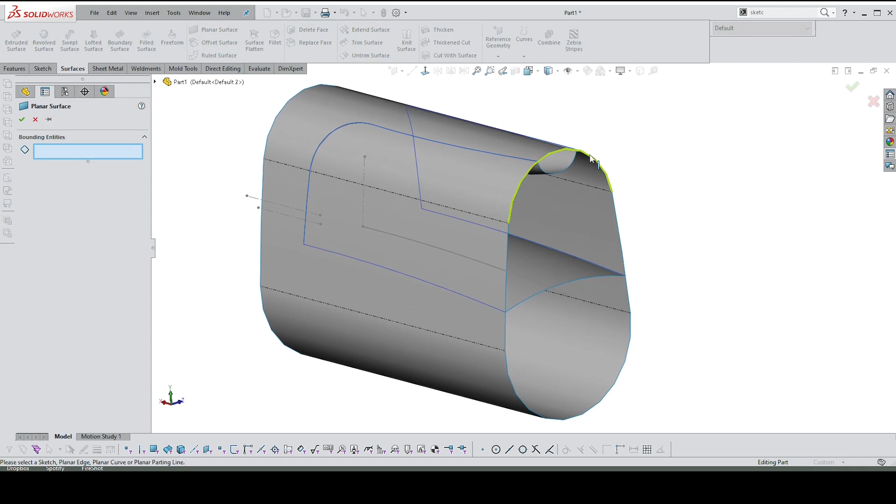And I think the easiest way to do this is just to go to planar surface. There it is, and just select. So here I can right click, select tangency. Say yes, let's do the same thing again. So I'm going to right click, select tangency, so I don't waste time selecting all of those curves.

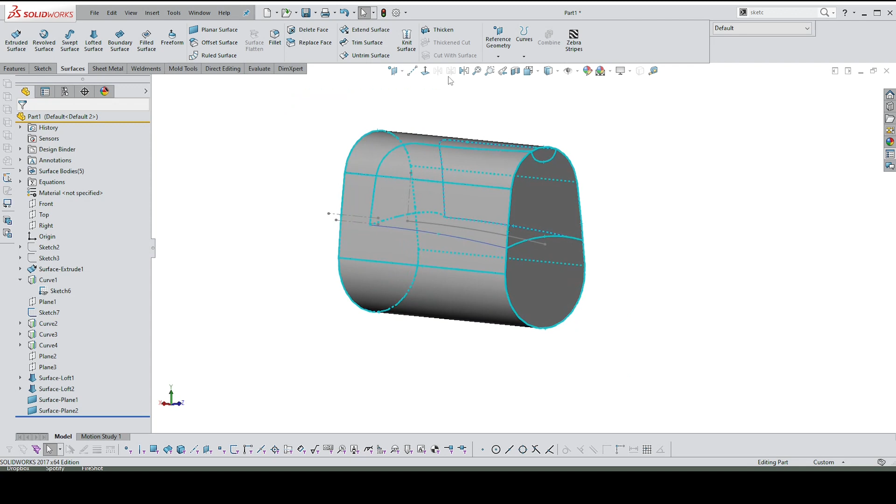And then the easiest way to do this, because you've got everything in one shot, is just to select everything you've got and say trim surface. Okay, sorry, the other way around. Say trim surface and then select everything you've got and then remove. So I've got a mutual one, which allows me to trim more than one surface at once. Remove the ones that you don't want. It's just those three actually.

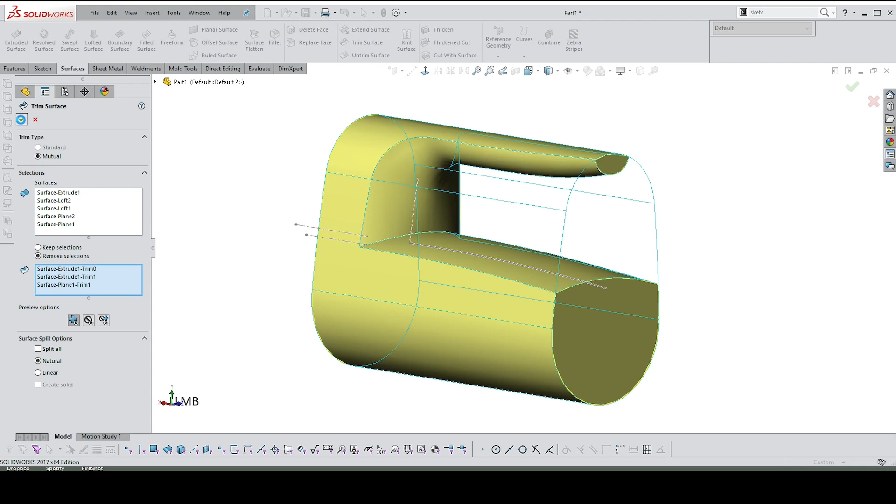And we've got something in place. And now I need to knit these surfaces, so I should be able to do, once again, just select them all. Say create solid, let's see if this will do it. So check if, and it's a solid. Right, brilliant.

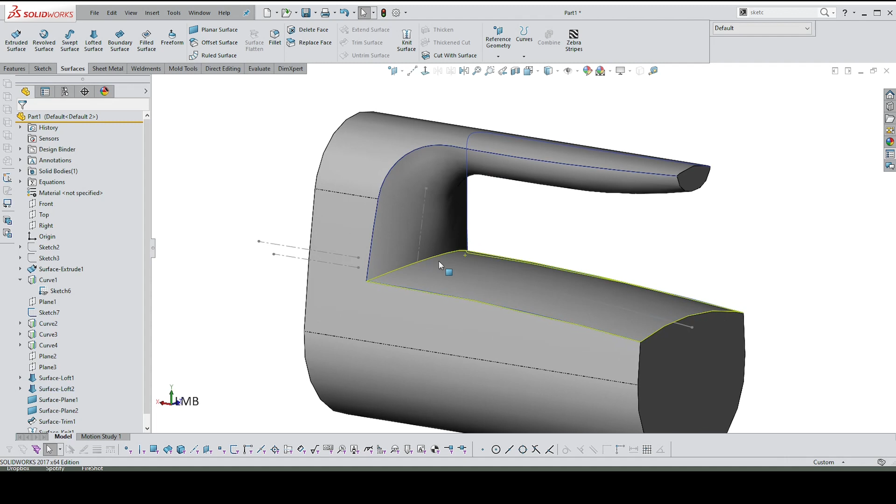Hopefully that helps, and then from here it's fairly simple adding items in. But I'm going to leave this video for now, and then I will finish off the rest in another video, which continues, showing details and such like. Thanks for watching, see you next time.